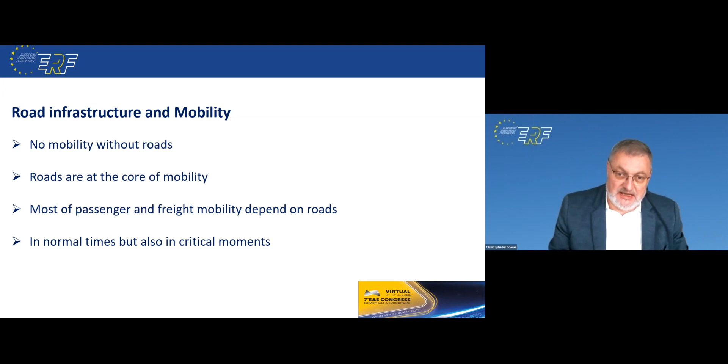And when I was talking about critical moments, obviously I was talking about the times of the COVID crisis and the lockdown. And what we saw, and this is really something very specific to roads, is that during these critical moments, roads could ensure an efficient, safe, and quick delivery of all the essential goods and services to all citizens, including the most remote areas. And this could guarantee mobility also for emergency services and for urgent interventions.

Really, we see that the roads were the main support of mobility. But this was a particular moment.

But even before the COVID-19 pandemic and the lockdown moments, we could notice a change in mobility patterns, mobility usages and behaviors with the emergence of new mobility patterns. For example, connected and autonomous mobility, electric or carbon-free mobility, and very specifically in urban areas, soft and active mobility, which developed quite a lot in the last years.

Based on these changes and developments, we wanted to see what could be the impact for road infrastructure. This is the reason why the ERF, in partnership with different organizations - CICA, FNTP, FIEC, and Routes de France - decided to initiate in 2019 an international benchmark study over 20 countries in the world to analyze and try to identify what would be the impact of these new mobility uses on road infrastructure and its equipment.

And again, I remind that this decision was made before the crisis linked to COVID-19. I'm not going to expand so much on that, but there were some very interesting first findings.

Regarding, for example, in Europe, a disparate integration of new mobility with a large difference between northern countries like Scandinavia, Germany, UK, and other EU countries in terms of approach and intervention of the authorities, for example.

But generally speaking, in Europe, we are more talking about adapting existing road facilities. We see also the importance of the different roles of public authorities and differences between the United States, Asia, and Europe.

A strong public support in Asia, in particular in China, where a lot of new constructions already incorporate new digital elements with strong support from the state, and also different approaches regarding the place of road infrastructure and different visions between America, Asia, and Europe, and different expectations from the users.

For Europe, what we found really is that the role of road infrastructure was generally underestimated, despite its essential role to enable new mobility, and despite the fact that the road has to comply with the new conditions of ecological and energy transition, which are the priorities from the Green Deal.

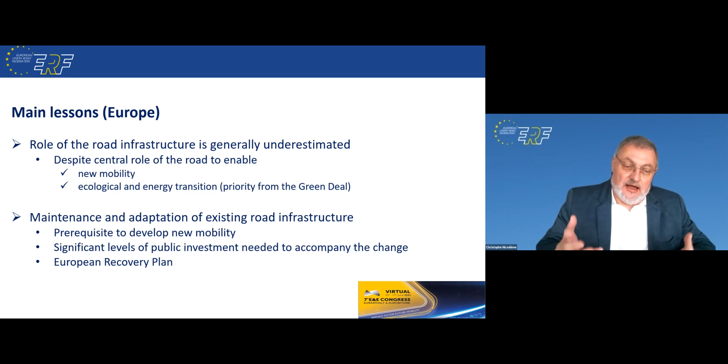Then we found ourselves a little bit frustrated after this first benchmark study, and we saw that new behaviors appeared, particularly linked to the COVID crisis, like teleworking, fewer cars in urban areas, a booming development of soft mobilities with new cycle lanes being constructed and installed in a couple of weeks, a rise of digital technologies, and growing importance and focus on climate issues.

So the post-COVID environment and the road infrastructure, all this combination gave us new perspectives for land transports and operators considering the National Recovery and Resilience Plans. So we decided to go for a second phase of this benchmark study, which will be published by the end of June this year. Let's come back.

This was a little detail on this benchmark, but generally speaking, what we see is that road infrastructure and new mobility will definitely be linked.

And whatever happens, whatever the changes are going to be, we will need to have an infrastructure that will adapt with a lot of flexibility to new mobility usages, and quickly, that should be resilient to climate change, that will be more and more connected, even why not self-healing in some cases, will be able to cope with different types of functions. We might also consider that the road could supply some energy.

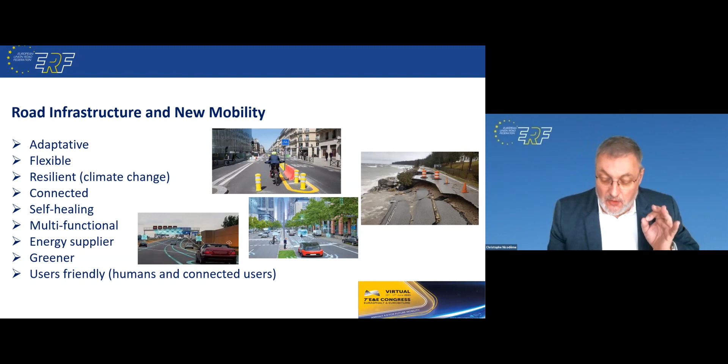It should be greener and it should definitely be user-friendly. And when I say that, it's quite important because we will have to consider connected users, but also non-connected users. The road infrastructure will have to keep on providing the same level of service for all types of road users. This really requires a lot of investment for preserving, improving, upgrading, maintaining the road infrastructure, making it ready for the future with a long-term vision from the road operators.

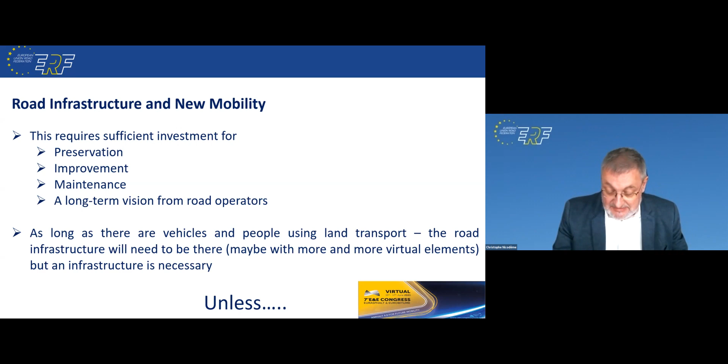And really, as long as there are vehicles and people using land transport, the road infrastructure will need to be there. Maybe with different forms, maybe with more virtual elements, but an infrastructure is necessary. And you see at the end, I say, unless our vehicles will stop driving and they will just fly.

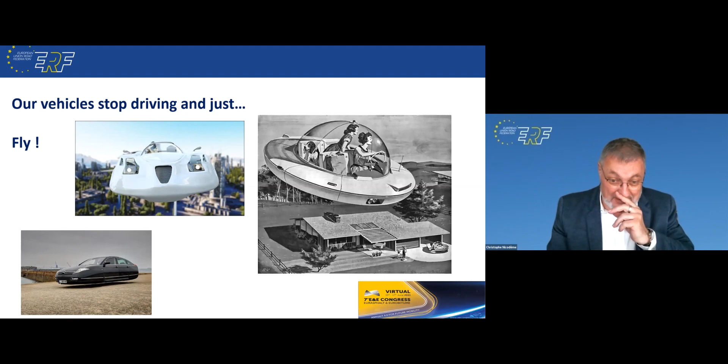And I found these, especially the picture on the right, very funny because this was a vision from the 1950s of what could be the car of the future, a very futuristic American way of life vision. But even if these cars could fly, this might not avoid some issues sometimes.

So anyway, the infrastructure will need to keep on providing the necessary service for all kinds of users in the future. Thank you very much for your attention, and I wish you a very interesting Congress.

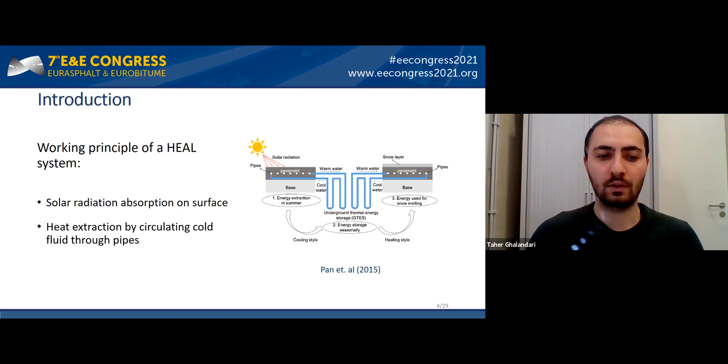For those who are not familiar with asphalt solar collector systems, I'll briefly introduce the working principle of the HEAL system. Solar radiation is absorbed on the surface of the asphalt pavement, and heat extraction is done by circulating cold fluid through the pipes. After that, we can store this extracted energy in a borehole or aquifer and use it in wintertime.

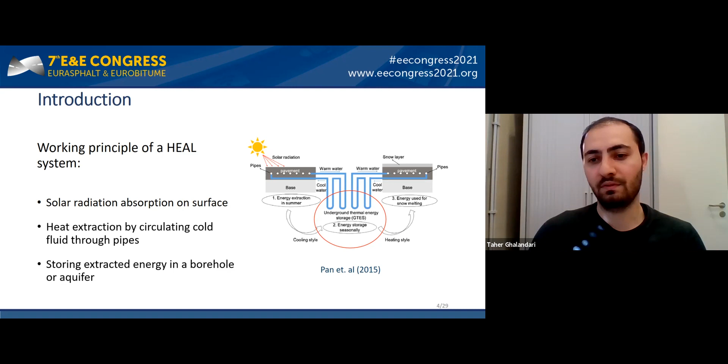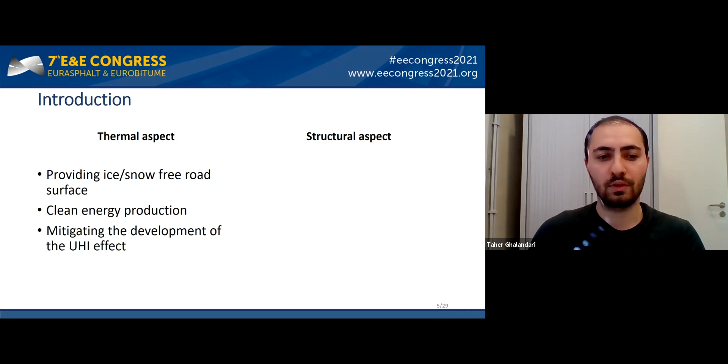We can divide studies on heat exchange asphalt in HEAL systems into thermal and structural aspects. In the thermal aspects, we have the advantage of providing an ice or snow-free road surface, clean energy production, and mitigating development of the urban heat island effect. On the structural side, we can control seasonal changes in pavement temperature and decrease the potential of pavement distress, all of which result in an increase in the service life of the asphalt pavement.

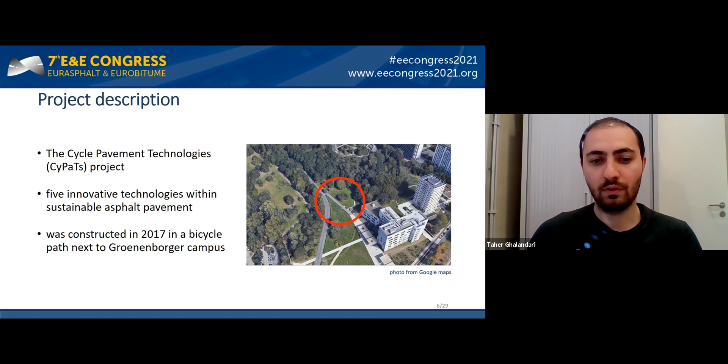For the project description, the Cycle Pavement Technologies, or CyPaTs project, has 5 innovative technologies within sustainable asphalt pavement. This project was constructed in 2017 on a bicycle path next to Campus Groenenborger at the University of Antwerp, and the HEAL project is one of these 5 technologies.

As you can see in the picture, the total area of the HEAL project, with 2 reference sections, is almost 65 square meters, and the pavement solar collector system is approximately 30 square meters.

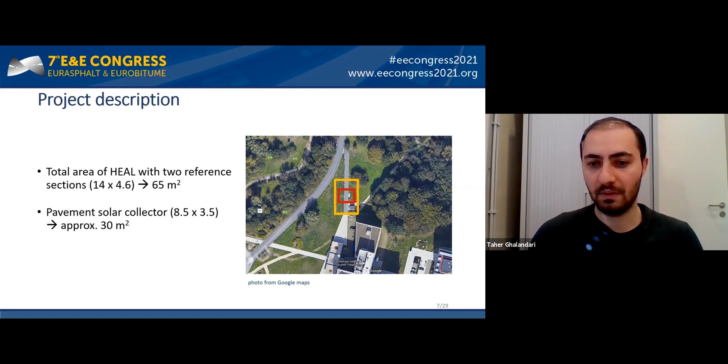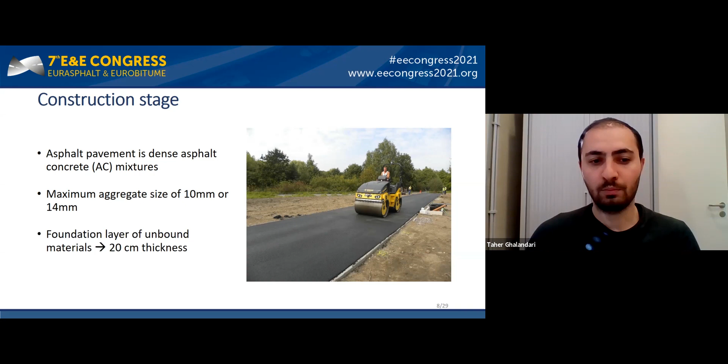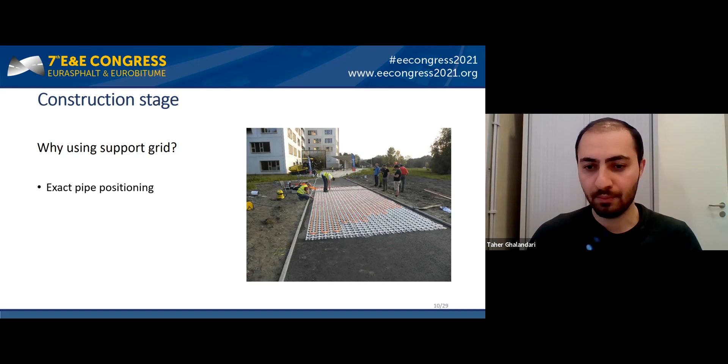In the HEAL system, we also used a support grid. Why? Because it provides exact pipe positioning, controls stress concentration around the pipe, and reduces machinery loads during the construction stage.

We also sprayed bitumen emulsion between the pipe and grid, and also for asphalt, in order to improve heat transfer, have better adhesion with the asphalt mixture when placing it, and allow movement between pipe and asphalt since the thermal expansion will be different between materials.

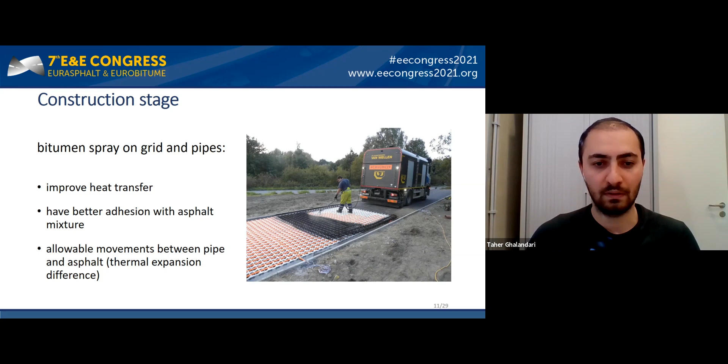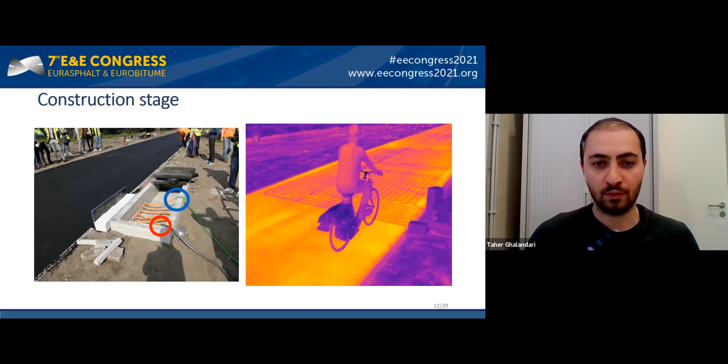It is also noteworthy that during construction, we were circulating cold fluid through the pipes, and from the other side, warmer fluid would come out. The reason was to keep the pipes undamaged because of the temperature differences. On the right-hand side, you can see a thermal picture of the construction after paving the asphalt.

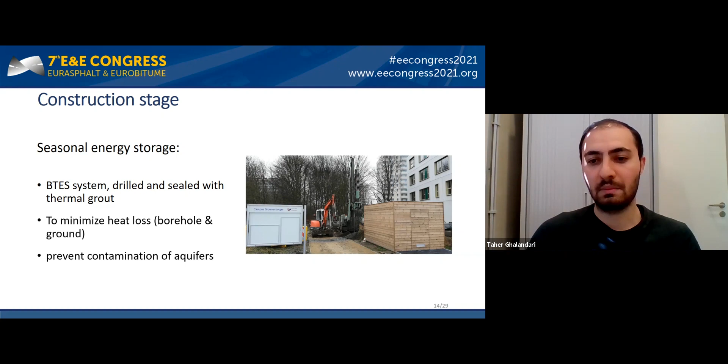We constructed 2 BTES with 100-meter depth each. These systems were drilled and sealed with thermal grout in order to minimize heat loss between the borehole and the ground, and the reason was to prevent contamination of neighborhood aquifers.

We also have temperature sensors in order to monitor temperature changes in the asphalt pavement. We used ultrafine wire PFA thermocouples. We have 4 sensor sections. As you can see in the schematic picture, we have 2 reference sections before and after the heat exchange section.

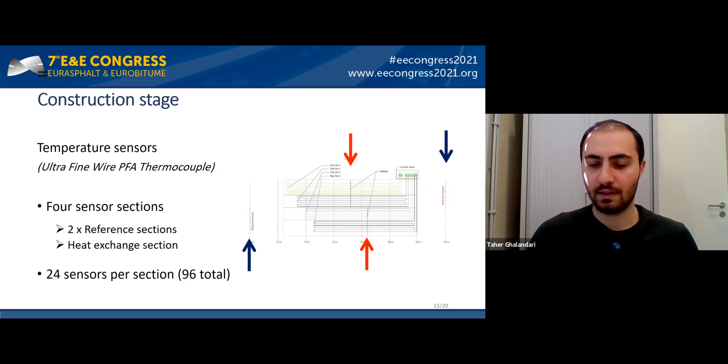In the heat exchange section itself, we have 2 sections. In each section, we have 24 sensors placed. In total, we have 96 temperature sensors, in order to monitor these carefully.

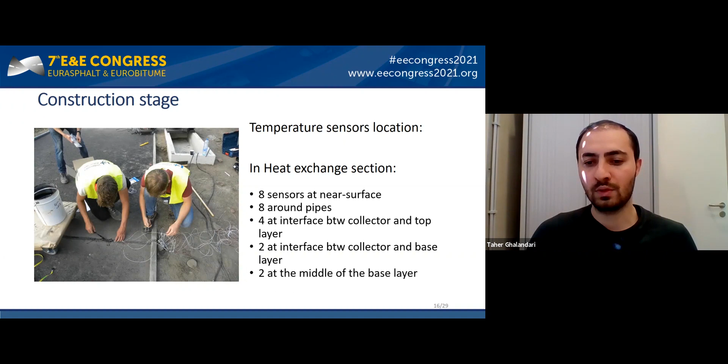In the heat exchange section, we have 8 sensors at near surface, 8 placed around the pipes; 4 sensors at the interface between the collector layer and top layer; 2 sensors at the interface of the collector layer and base layer; and finally 2 sensors in the middle of the base layer, to monitor almost everything.

All these sensors, together with flow sensors, inlet and outlet temperatures, and actuators, are connected to a Beckhoff terminal in the technical room, and they are logged. All the output data is logged using a programmable logic controller, or PLC, terminal.

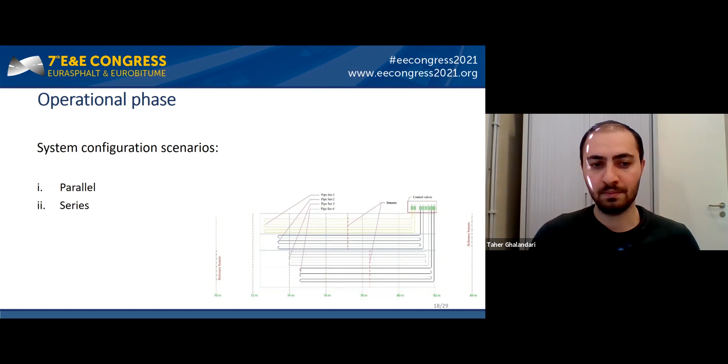For the operational phase, our prototype is very flexible in its configuration. We have a parallel configuration, where we can have 4 different sections working at the same time, or we can have a series configuration, meaning we can have one big circuit of pipes, or a combination of parallel and series.

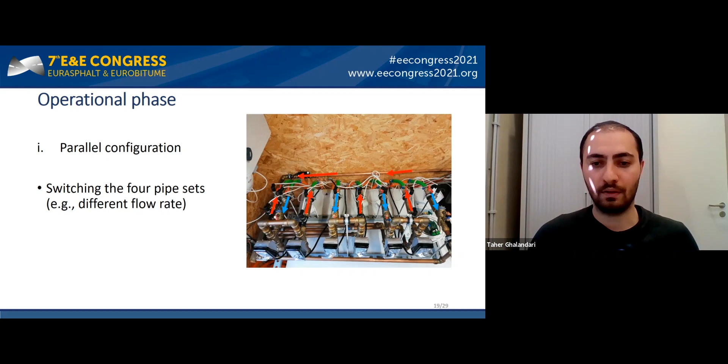For the parallel configuration, for example, we can switch all 4 pipe sets together at once. This lets us test different flow rates at the same time, meaning we have 4 inlets going in and 4 outlets coming from the whole system. Schematically, this results in a 50-meter pipe length for each set, 4 inlets going at the same time, and 4 outlets coming out of the system.

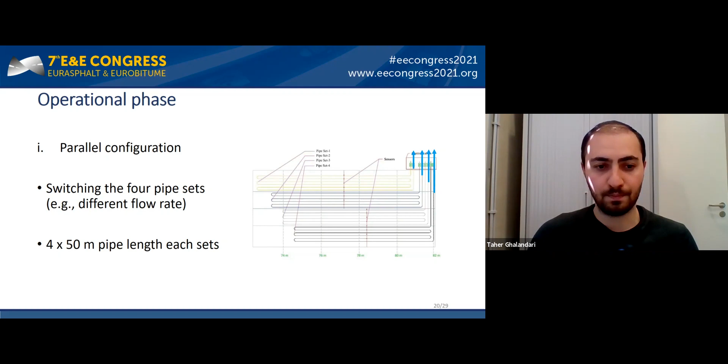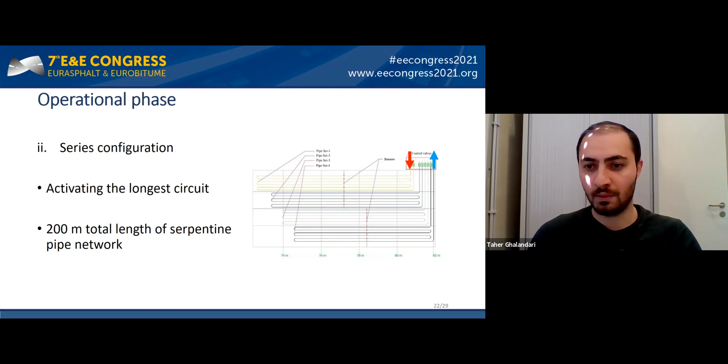In addition, we can activate the system in series configuration, meaning we use the longest circuit with 1 inlet going in and 1 outlet coming from the system. This results in 200 meters of total pipe network length. Schematically, you can see 1 inlet going in and the outlet coming from the end of the system.

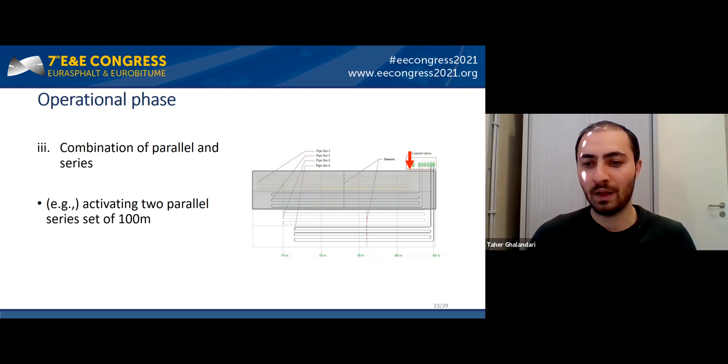We can also combine parallel and series configurations together, meaning we can activate 2 parallel sets or 2 series of 100 meters. So we can have 1 set of 100-meter series in parallel with another one at the same time, giving us a combination of both configurations.

Next to the field prototype, we also have a standalone weather station. In this weather station, we can monitor many different weather parameters, such as relative humidity, solar radiation, wind speed, and so on. We also have a standalone data logger to monitor whatever is going on with respect to weather parameters.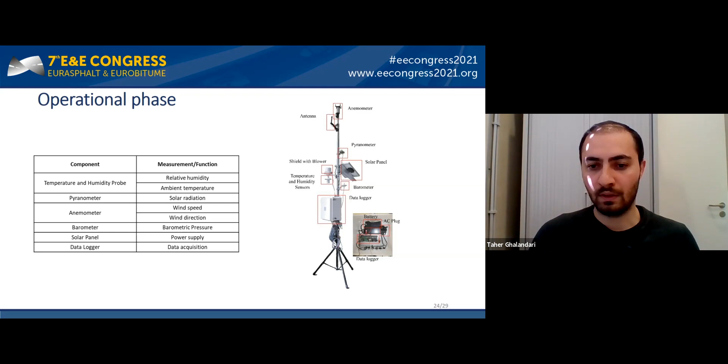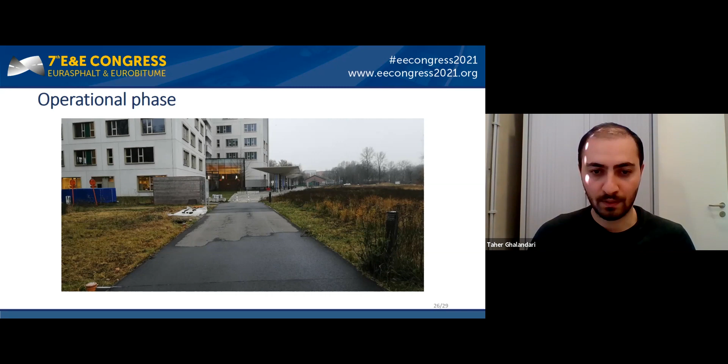For the operational phase, this was one of the pictures from the test phase. After a couple of hours of running, we had this output, so you can see we monitored all the data and system configuration for these hours.

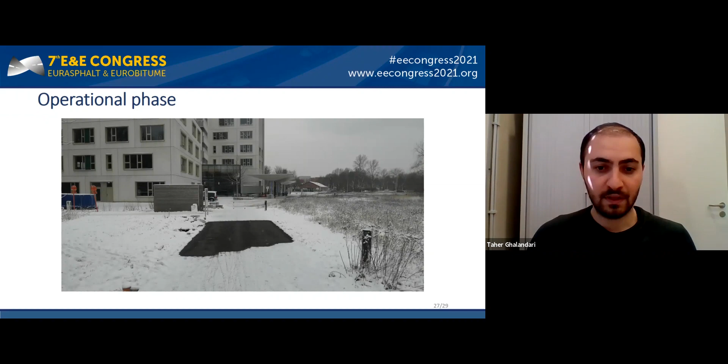During February, we also had almost harsh snow for Belgian weather conditions. We monitored all the data for these days, and we can see that the project succeeded.

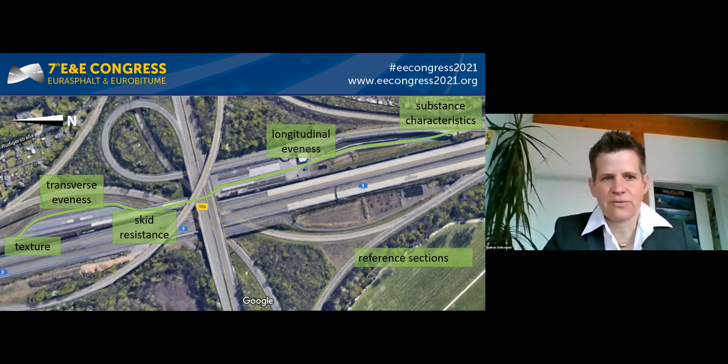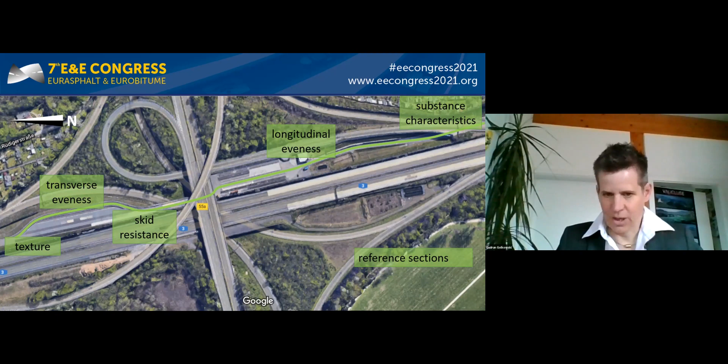The reference sections have sections with texture, with transverse evenness and skid resistance, longitudinal evenness, and also for substance characteristics. The demonstration and investigation sections are placed in the middle of the test sections. Furthermore, we have a bridge in this area, which is equipped with different sensors, so we use this bridge for bridge monitoring.

The tempered road sections will be installed right in the middle of our test sections, and the energy system will be installed directly close to it. So what are the research aims of our project? Firstly, we want to demonstrate the functionality of tempered road sections. We want to install an automated control and regulation of the system. We want to evaluate the efficiency of the temperation. And based on all those findings, we want to derive an analytical design method for tempered roads.

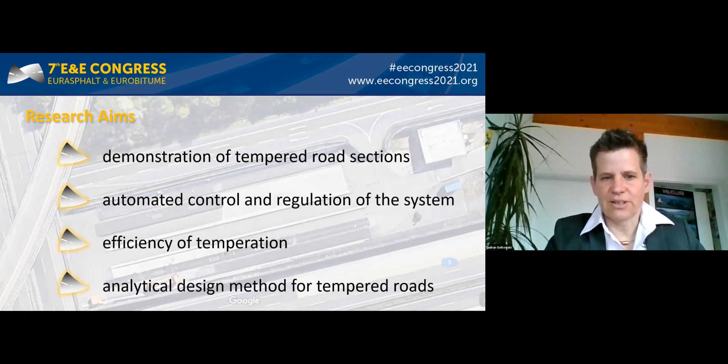The sections will be subdivided into 5 subsections and the energy system. Of the 5 sections, 2 will be equipped with pipe registers as a standard temperation system, and 3 sections with an innovative porous bound interlayer.

So the two pipe register sections: all our test sections are referenced to a standard, the German standard RSTO. We choose a loading class of BK 3.2, which means the upper structure is meant to last for 3.2 million 10-ton axle overruns within a lifetime of 30 years.

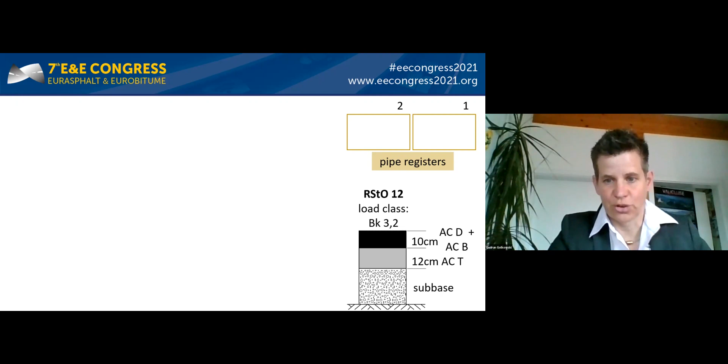We will have a two-pipe system with helical lines, and we also will have a single-pipe system with serpentine lines. The pipe registers are embedded into a 4 centimeter mastic asphalt course, and they will be covered by a 3 centimeter mastic asphalt wearing course.

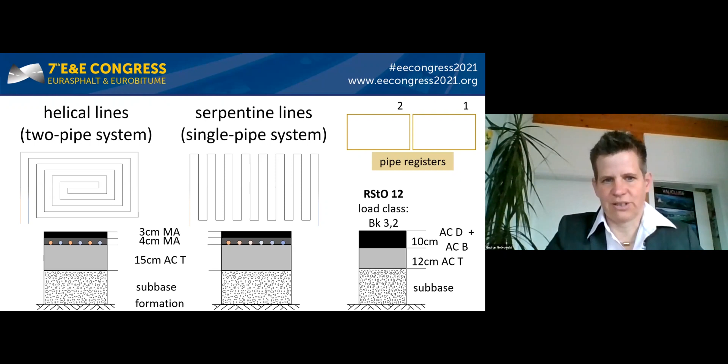The other 3 sections will be equipped with our innovative porous bound interlayer. But what is a porous bound interlayer? It is placed on the asphalt base course and covered by a mastic asphalt course. The characteristics are: it is open graded and polyurethane bound, so we don't use any bitumen because bitumen is highly sensitive to air and water. The structure of this porous bound interlayer has a very high void content of over 30%, and furthermore it's highly permeable.

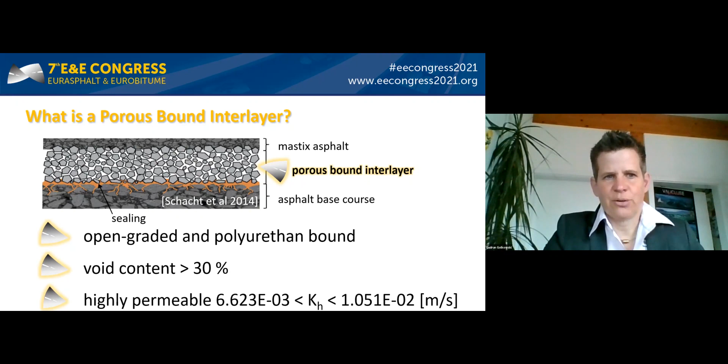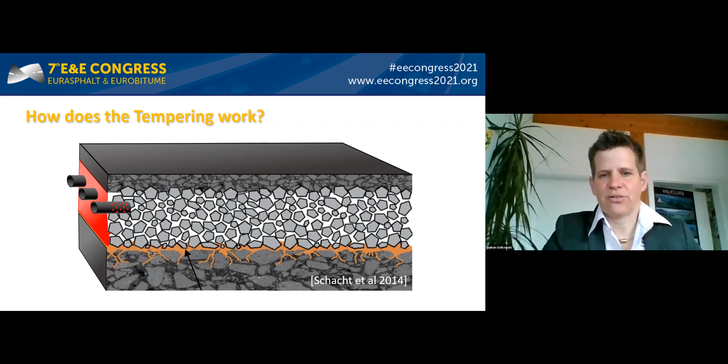So how does the tempering work in this interlayer? We have the structure, and in the tempered layer we introduce the tempering fluid through pipes. The fluid passes through the layer and will be collected in manifolds at the other end of the pavement and recirculated to the energy system.

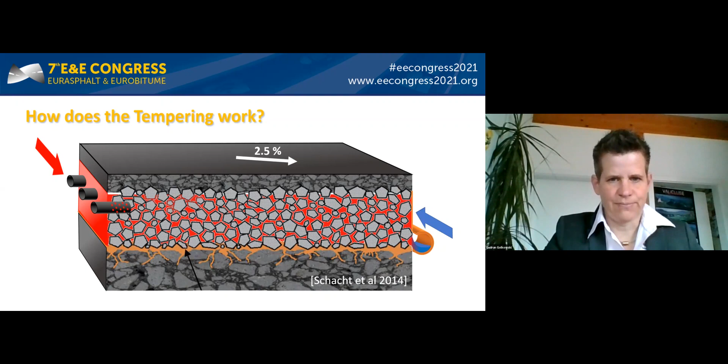So we will have 3 different sections with porous bound interlayers. They are also referenced to our standard. We will have a 5 centimeter interlayer with a gradation of 0 to 8 millimeter grain size. The second section will have the same thickness, but we will use another gradation of the mixture. And the third section will use the same gradation of the mixture, but with another thickness of the pavement.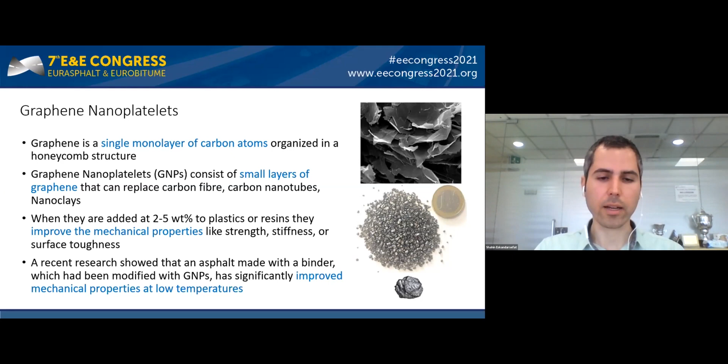But what is graphene nanoplatelet, and why has it been used in this asphalt super modifier? Graphene is a single monolayer of carbon atoms organized in a honeycomb structure. According to the existing literature, it has been shown that the addition of 2 to 5% to plastics and resins can significantly improve mechanical and performance properties such as strength, stiffness, and surface toughness.

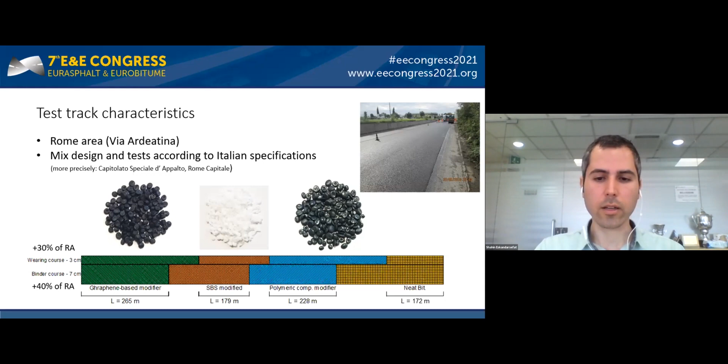Here you can see the plot showing the trial section done during this research. This trial section is located in Italy, in the Rome area, via Ardeatina. The trial section consisted of both wearing course and binder course; here I'm going to present just the wearing course test results. As you can see in this plot, the trial section was divided into four different sections: the first graphene enhanced super modifier, the second SBS modified mixture, the third a plastomeric polymeric compound modified mixture, and finally the neat bitumen.

The mixture was a dense graded asphalt mixture, and the bitumen was a 70/100 bituminous binder. The dosages, as you can see here, were 5% for the graphene enhanced super modifier, 3% for the plastomeric polymeric compound, and 5% for the SBS modified mixture.

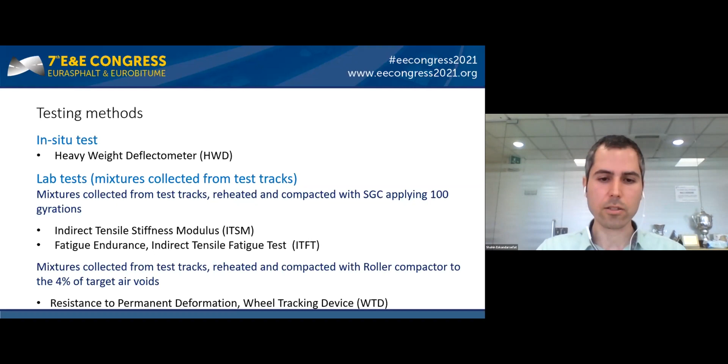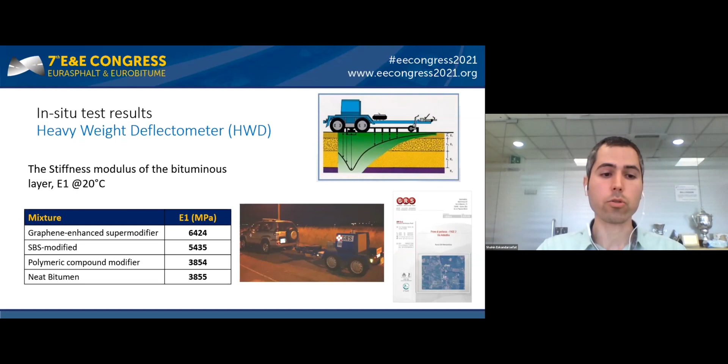The testing plan included both in situ and lab scale tests. For the in situ tests we used a heavyweight deflectometer, and in the lab scale tests the mixtures were investigated by means of modulus, fatigue endurance, and resistance to permanent deformation. The in situ heavyweight deflectometer test was done at around 20 degrees centigrade. According to this table, the modulus of the mixture containing the graphene enhanced super modifier was almost double compared to the neat bitumen, and comparable to or superior than the other two tested mixtures in this study.

Continuing with the lab scale test results: the first test was indirect tensile stiffness modulus, done according to European standard number 26. The test was done at three levels of temperature, 5, 20, and 40 degrees, representing low, medium, and high temperature respectively. According to this plot, thanks to the presence of the graphene enhanced super modifier, the stiffness modulus of the mixture at all three tested temperatures was higher.

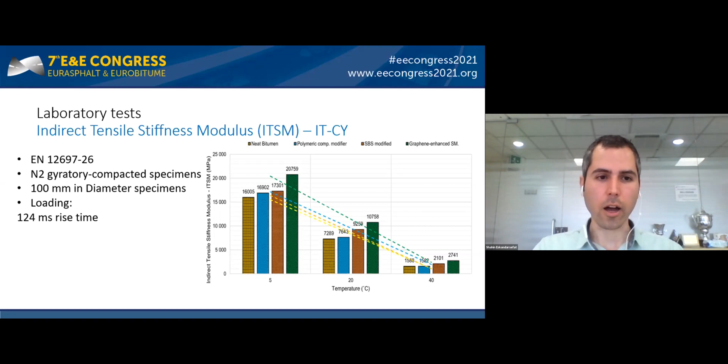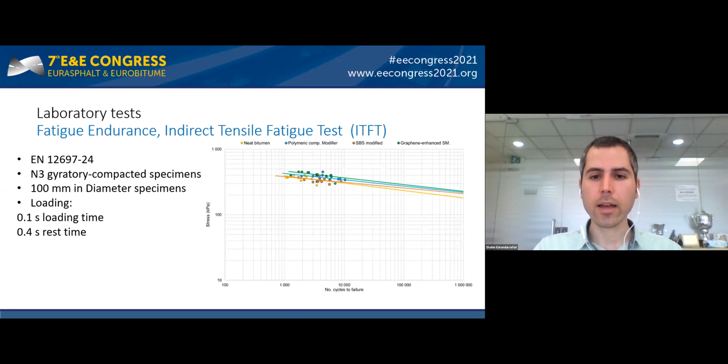This could be expected since during the ITSM modulus testing and HWD in situ testing, we have seen higher stiffness for the mixture containing asphalt supermodifier. The last test was fatigue endurance, done according to European standard number 24 by means of indirect tensile fatigue test. According to this plot, the mixture containing graphene enhanced asphalt modifier showed significantly better results compared to the reference neat bitumen, and comparable or better results compared to the commonly used SBS modified mixture.

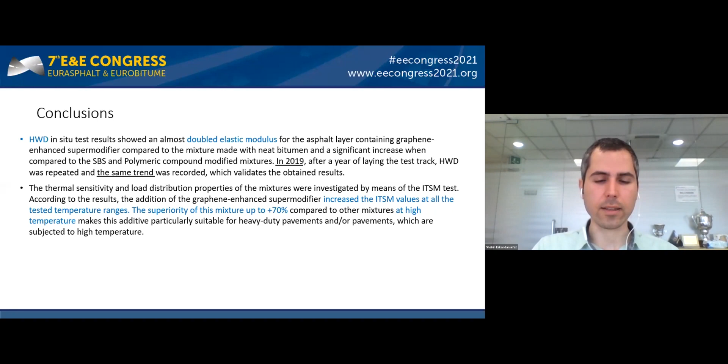Conclusions: in this early stage trial section in 2019, HWD test results showed almost double modulus for the mixture containing the graphene enhanced asphalt modifier. The thermosensitivity of the mixtures was investigated by means of ITSM modulus, and as seen in the HWD investigations, the mixture containing supermodifier showed a significantly higher modulus compared to the other three tested mixtures.

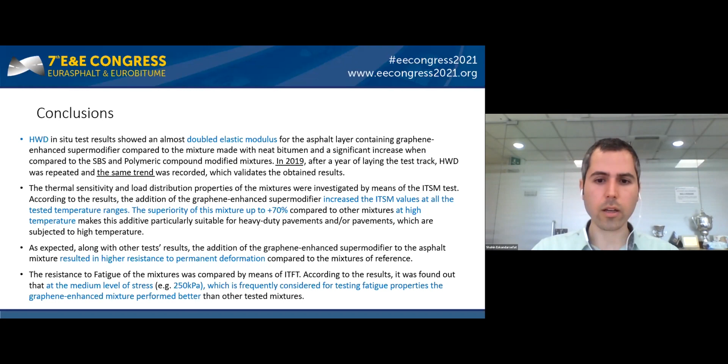As expected, the testing results during permanent deformation showed better results for the mixtures thanks to the presence of graphene nanoplatelets in this mixture. Finally, the resistance to fatigue of the mixtures was compared by means of ITFT, and the mixture significantly showed better results compared to the neat bitumen mixture, considering 250 kilopascal as a common medium level of stress for fatigue investigations. The mixture showed 60% higher and better results for the mixture containing supermodifier, and significantly better results compared to the other plastomeric mixture.

Thank you for your attention, and join hands to save the environment.

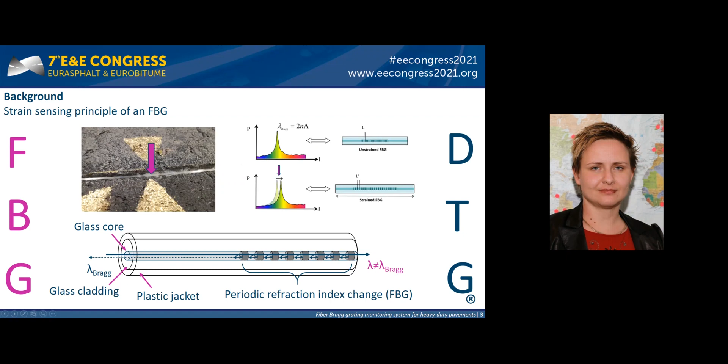Due to the complex characteristics of pavement structures, few available references provide definitive specifications on their mechanical properties. Installation of fiber Bragg gratings in asphalt pavement is a rather sensitive matter. It requires understanding and field expertise on how the materials work together so that fragile, high-tech fiber optics can handle the harsh and rough environment during asphalt pavement construction and its service life.

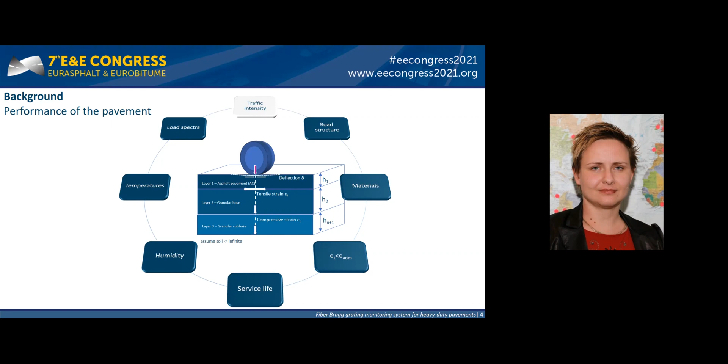The first FBG monitoring system prototype was installed at University of Antwerp in 2017 in the bicycle path, CyPaTs, when two installation methods were applied. One was in prefabricated asphalt samples, similar to research from Kajima Technical Research Institute in Japan, and the other was sawn in grooves at the bottom of the asphalt layer. The survival rate of the sensors was 100% during construction and 60% during service life.

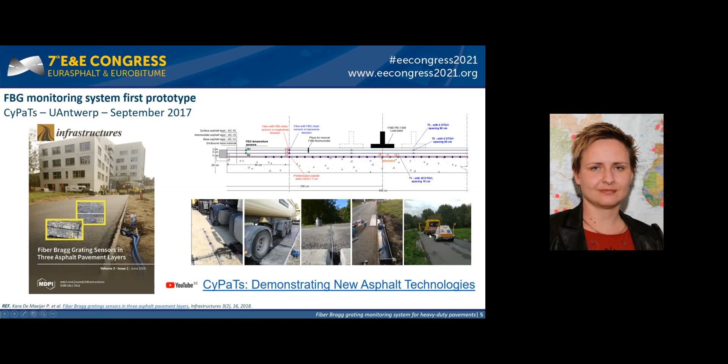The second FBG monitoring prototype was installed in a heavy-duty pavement in the port of Antwerp in 2019. The design of this sophisticated system had strain sensors oriented in longitudinal, along-the-drive, and transverse directions, with temperature sensors at each road structure layer, elaborated together with common sense, and it was successfully placed. However, facing real construction of heavy-duty pavement and traffic, the system had to undergo significant sensor loss, mostly related to difficulty of installing sensors in GeoGrid and in the prefab element.

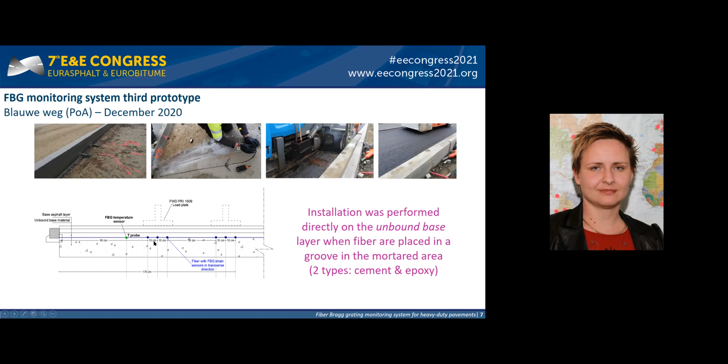Considering the difficulty of installing FBG sensors in prefabs, an alternative solution was tested at Test Blauwe weg in the port of Antwerp last December. The installation was performed directly on the unbound base layer, where FBGs were placed in a groove filled with mortar, and two mortars were tested: cement-based and epoxy-based. The survival rate showed 100% of sensors surviving, and a temperature sensor was also placed nearby; this installation was mostly meant for performing falling weight measurements.

The advantage is that the FBG system proved to be successfully installed without sawing the whole asphalt layer in two parts. In general, these systems can be continuously monitored at each layer of the road structure for a long period of time, during all seasons.

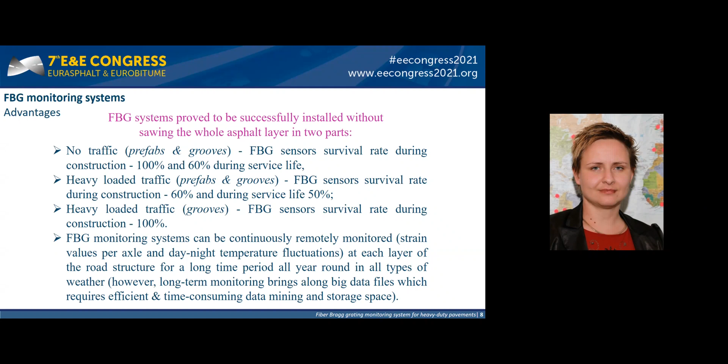However, long-term monitoring brings along big data files, which require efficient and time-consuming data mining and storage space. Regarding advantages of installation, the best installation can be carried out in grooves. Regarding disadvantages, FBG monitoring systems are very sensitive to loss of sensors, particularly at the GeoGrid level, and prefabs are not really suggested for installations.

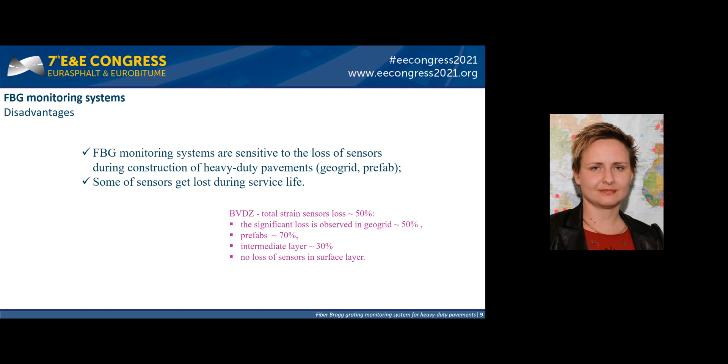Here you can see the total sensor loss during the 2019 installation. We lost mostly 50% of sensors, mostly related to GeoGrid and prefabs, while there was no sensor loss, for example, in the surface layer. Also, during service life, you might lose several sensors.

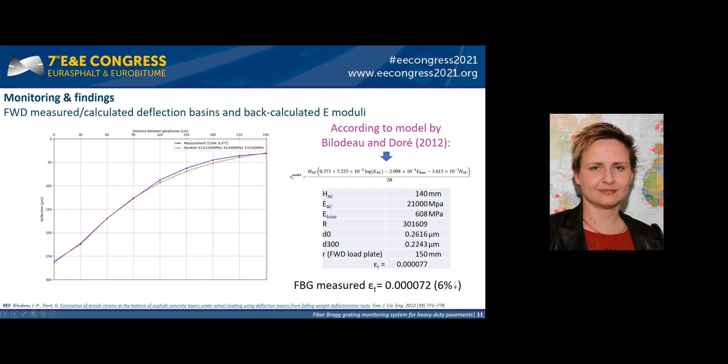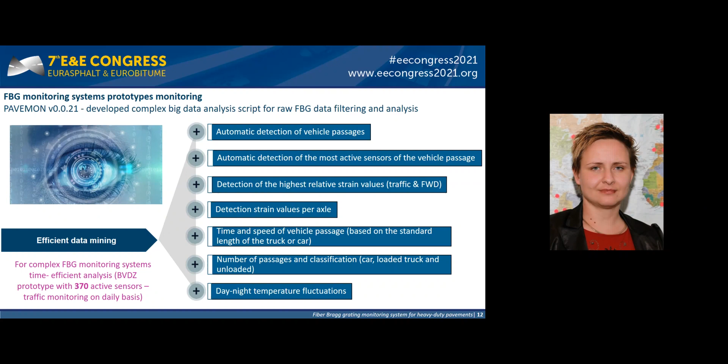The continuous monitoring was the reason for developing a complex script to process and analyze the big data from the monitoring campaigns, further developed to have a user-friendly interface and an easy way to overview the information.

Here is a little example of data for one truck passing over the system with an indicated overload. Here you can see the extraction of one truck passing, and it shows that it has 4 axles, one of which is clearly overloaded.

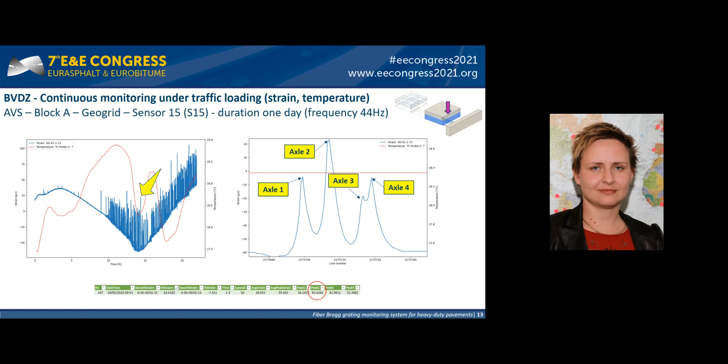Performing continuous monitoring of the pavement, there is a possibility to have an overview of the applied strain values and their intensity over time, which normally have to stay below 50 microstrain. Here you can clearly see that some of the asphalt layers are overloaded.

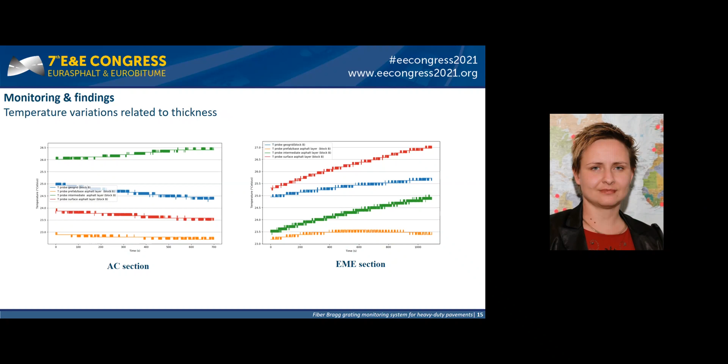Performing continuous monitoring of the pavement also allows observing the variation of temperature in different asphalt layers and asphalt types.

Design of three FBG monitoring system prototypes, CyPaTs, BVDZ, and Blauweg, was elaborated and tested. The outcome of this work will be applied in a simplified installation of FBG sensor configurations in the next 4 test tracks in the port of Antwerp.